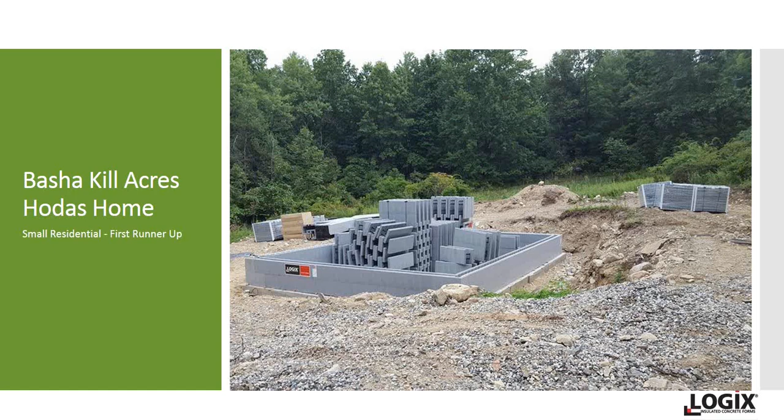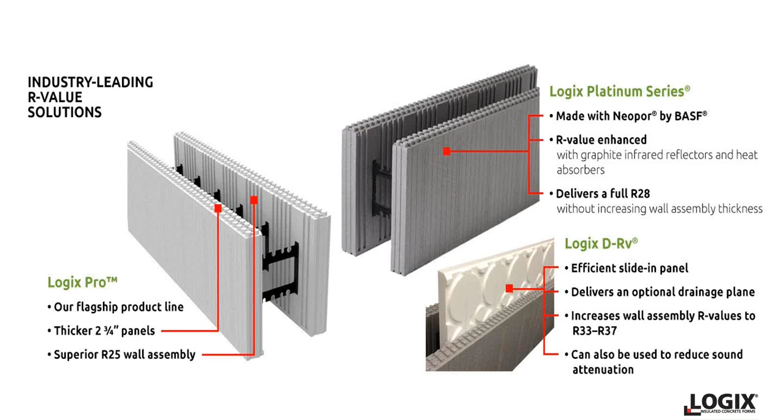This home is constructed with Logix Platinum Series forms with Logix D-Rv panels for an R36 R value. You can see in the bottom top right, Logix Platinum is made with an enhanced EPS, actually graphite polystyrene, which provides an R28 wall assembly R value, as opposed to the regular Logix Pro which provides an R25 R value. Troy also inserted the Logix D-Rv panels, which provide a supplemental R8, giving the wall system an R36, which is fantastic thermal performance.

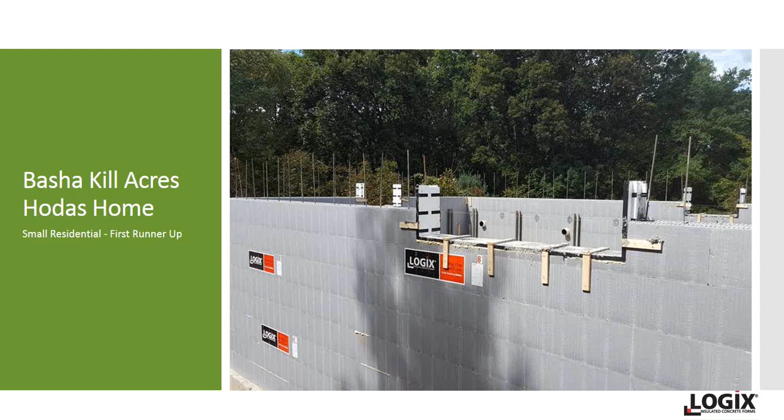Here we also see the house in progress, and you can see Mr. Hodas making use of the Logix Pro Buck for the window openings, once again to enhance the thermal performance of the building and eliminate thermal breaks at the window and door openings.

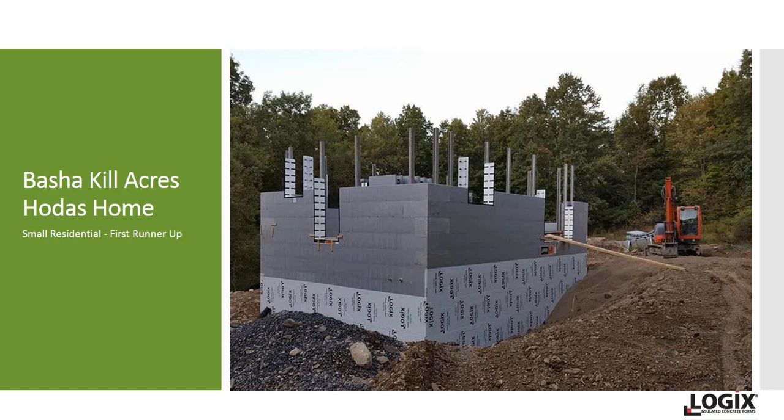You can see here the home taking shape. This was a self-built home; Troy and his friends built this home largely themselves. They had some classic things happen—midway through the build, a baby kid was on the way, which was fantastic but certainly provided a little distraction and excitement to the building process. But they persevered and moved along.

You can see that this home features a very simple rectangular design so as to reduce the heating and cooling loads and heat loss. The floor systems span wall to wall, allowing for an open concept design. The roof features a raised heel truss.

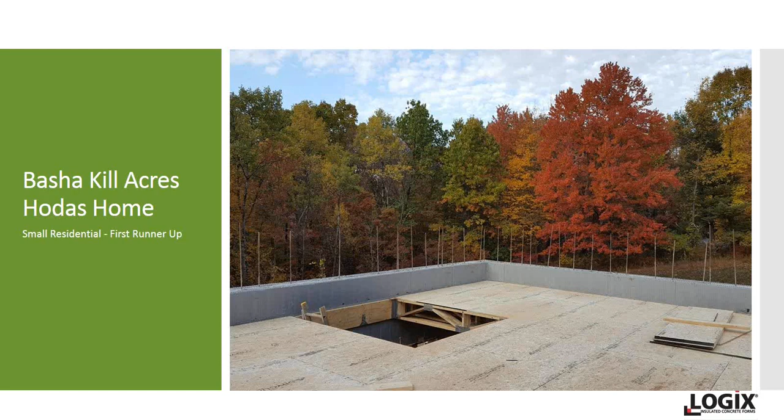You've got R20 under slab, R70 in the roof, and triple pane windows. So this is just an extremely thermally efficient building envelope.

Here's another picture of the project, and of course the setting is just beautiful. This home has a HERS rating of 30 without solar, which means it's 70% more energy efficient than your code-built home. So it's absolutely fantastic.

And it's a HERS rating of 3, which puts it in the top 3% of energy efficiency homes with solar. And there you can see the solar that this home has got, the PV panels. They'll eventually tie in solar thermal water heat that'll tie into the radiant floor heating, and that'll happen.

This home is in the country, in New York. This winter, an interesting story Troy sent over on a very cold day in February, it was 28 degrees Fahrenheit. The power went out, and not for the first time this year. Troy actually noticed that the temperature inside the home was 69.8 degrees.

5 hours later, when the power resumed, the home was still at 69.4 degrees. So it hardly moved, really showing the thermal performance and the thermal mass properties of the ICF walls. This home was constructed for roughly a very reasonable $126 per square foot.

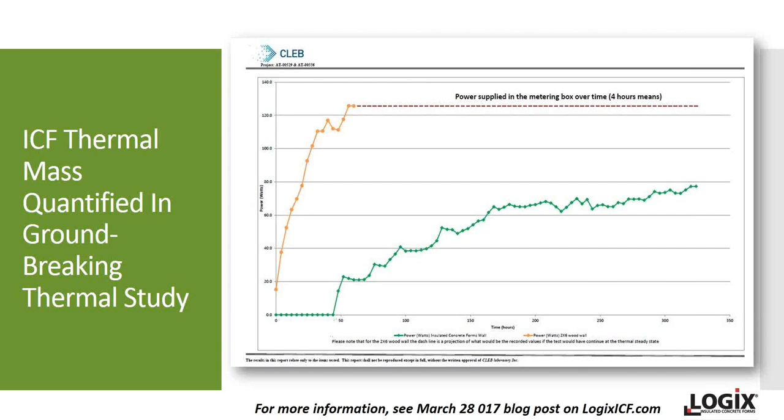So there were a lot of other really interesting things about this study, but if you want to learn more you can see that. Anyways, we want to congratulate Troy Hodas for being first runner-up, small residential.

Next category, or next project, our small residential outright winner. And the winner is Su Verde, the proud green home of Kentucky. This was built by Uber Green Spaces and Homes, and overseen by Travis Kittrell, Logix Territory Manager.

This home is located in Louisville, Kentucky. It's actually located in Norton Commons, which is a new urbanism community known to be very socially restorative, promoting health, wellness, and healthy spaces. In fact, this community has its own geothermal system that all the homes participate in.

This lot was picked specifically for the long side of the home to be facing south for proper heat loss and gain. And the developer, Sai Safi, who owns Uber Green Spaces, exquisitely detailed this home, not only in the finishes that you can see, but also in other aspects of it as well.

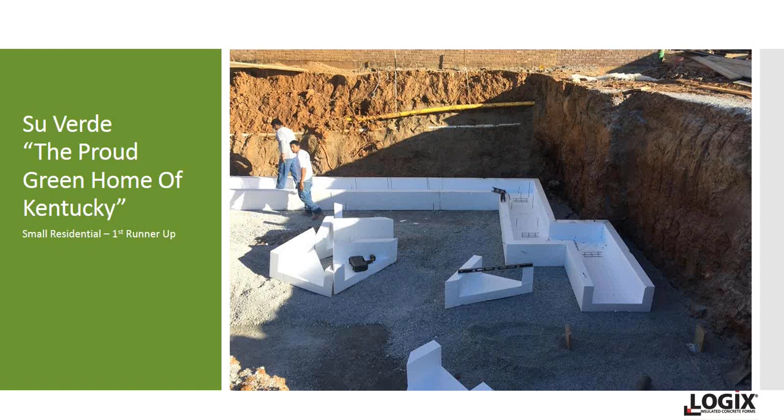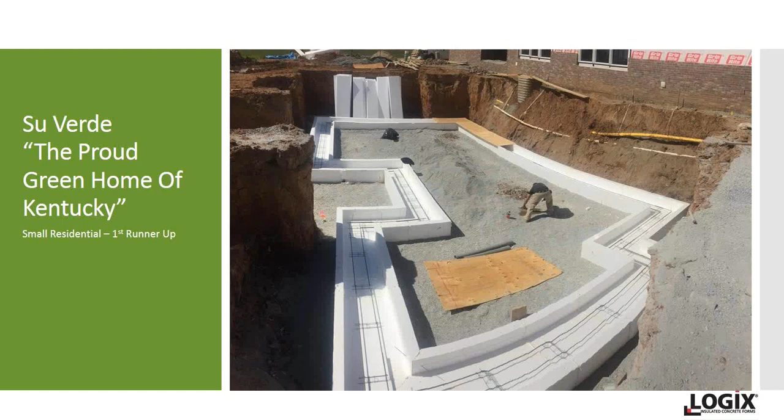Here's the project just starting, and the first thing that's unusual is that Sai actually had his footings fully insulated with these custom foam molds, and this is really rare, you don't see this too often. Sai went to the point of insulating his footings, and you can see a complete picture of that. Then they poured concrete in there, showing the insulated footings.

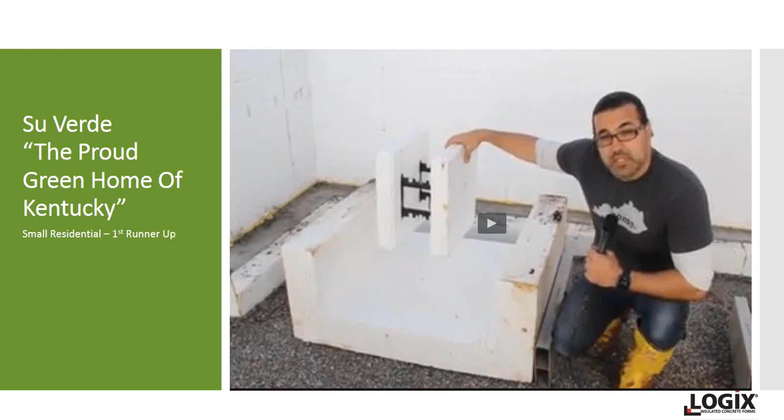There's Sai explaining how this worked on TV. This home got a lot of promotion online and in print exposure.

Sai is showing how the insulated footings integrated with the insulated Logix wall so as to be a complete thermal break. Sai approached this home wanting all sides of the home to be significant and efficient thermal breaks.

He insulated the footers and under slab with 6 inches of foam. The flat roof is insulated with 6 inches of foam, and areas that weren't flat were insulated with 22 inches of open cell foam, so the roof is actually R85.

The exterior walls, which you're starting to see here, were furred out to be beyond the typical Logix R25. They were furred out to hit R40.

Sai also used, as did Troy in the previous project, the Logix Pro Buck to eliminate thermal breaks through the wall at the openings. Here you can see the house taking shape.

Sai also specified triple pane windows, European triple pane windows for this home. This home tested at a sparkling 0.6 air changes per hour.

This home was a demonstration house in the local Homerama. It's LEED Platinum certified, NAHB certified, Emerald certified, DOE Net Zero, Passive House certified, and met the Living Building Challenge.

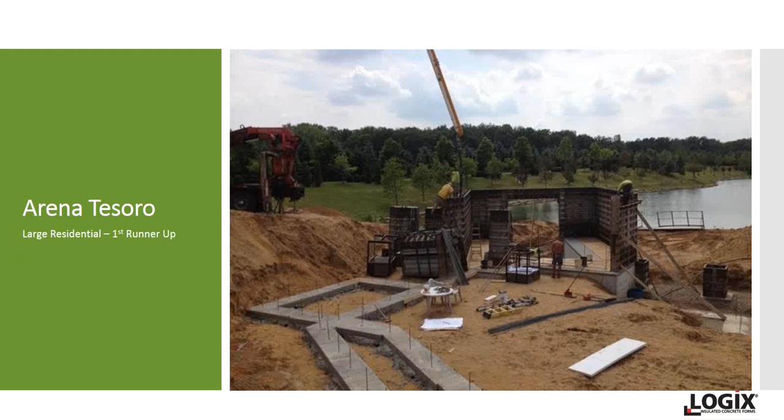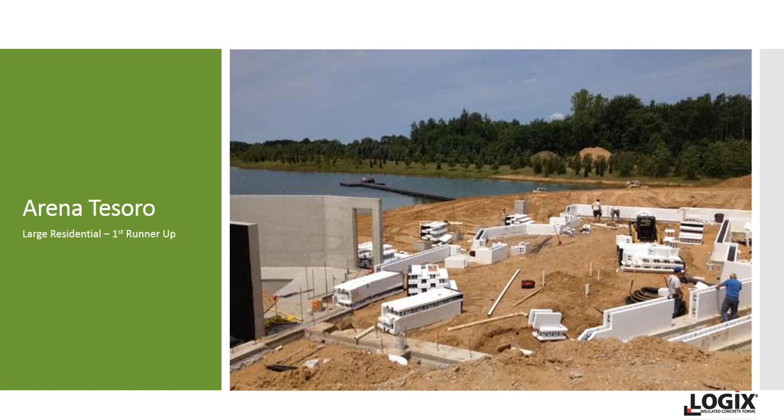They used—and there you can see the footings for the actual boathouse, just starting in on the footings there. Another shot: they used 10-inch Logix Pro forms for the basement walls and 6-inch Logix forms for above grade. That 4-inch differential created a ledge for the main floor system that they hung bar joists on.

This home features 12-foot high main floor walls, including a flying gable. You can see the brick ledge being used on the outside there to support a lot of the stone finishes that are going to eventually be on the home.

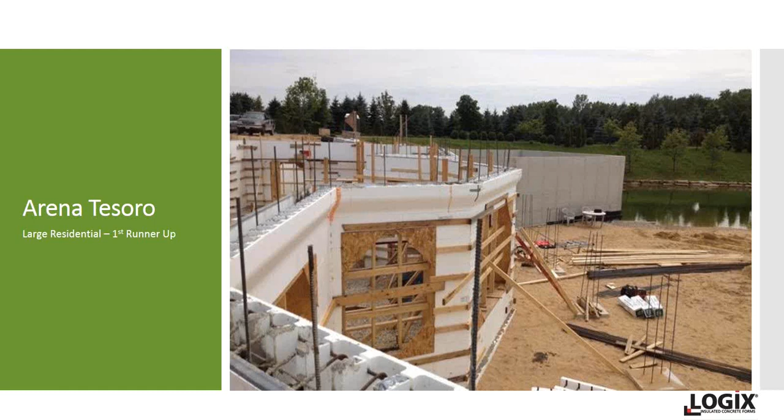You can see them proceeding here, and they're on the boathouse, laying the precast floor system bearing on the Logix walls for the boathouse. And of course, that lake, that's their own lake that they have, which is fantastic.

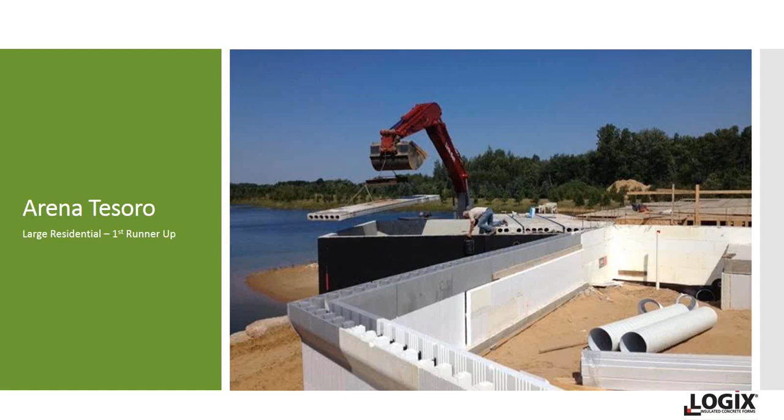There are many unusual angles to this home. They have an indoor pool—you can build your indoor pool with Logix and your pools with ICF, but they did not. They chose to just form it regularly.

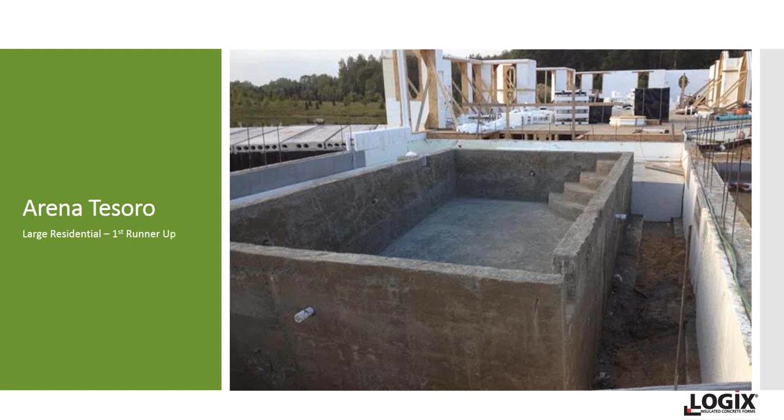Probably the most difficult aspect of this home was the boathouse, which juts 45 degrees out from the home. The footings to the boathouse were 7 feet below water level, while the main house footings are 2 feet below water level—a 5-foot differential, very challenging to connect all of that up.

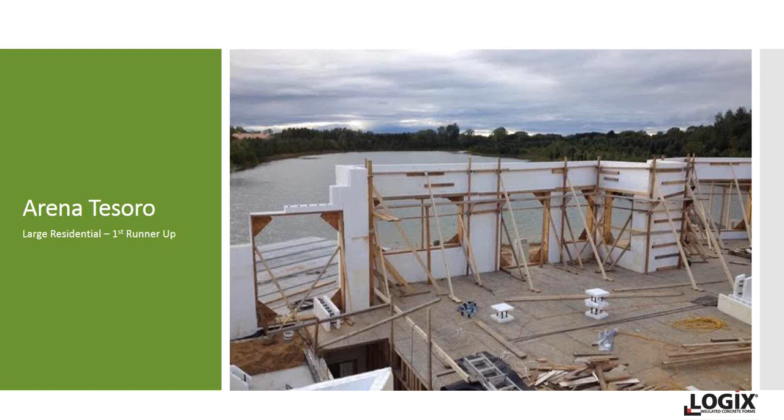And there you can see everyone moving the process over the flying gable and over the arched windows. This home was actually built by the homeowner, who took a Logix training course.

Lots of homes can be built by Logix. Most are built by professional builders, some are built by homeowners, but very few of this size and scope are undertaken by a homeowner for their first home. So it's an incredible achievement.

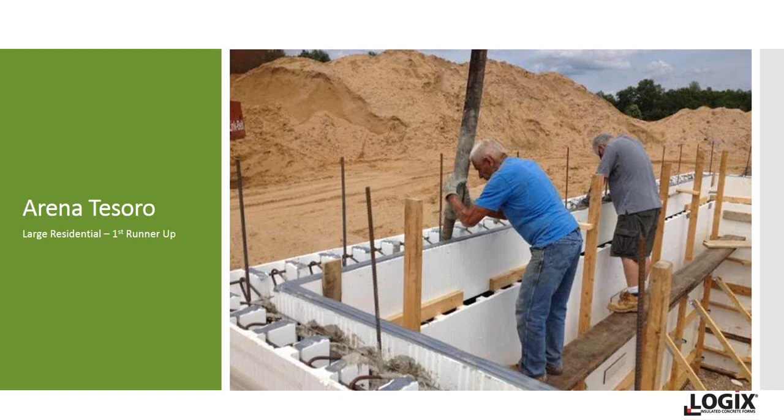This home is heated with 4 ground source heat pumps. The monthly heating budget is estimated to be $300 a month, including heating the water of the indoor pool.

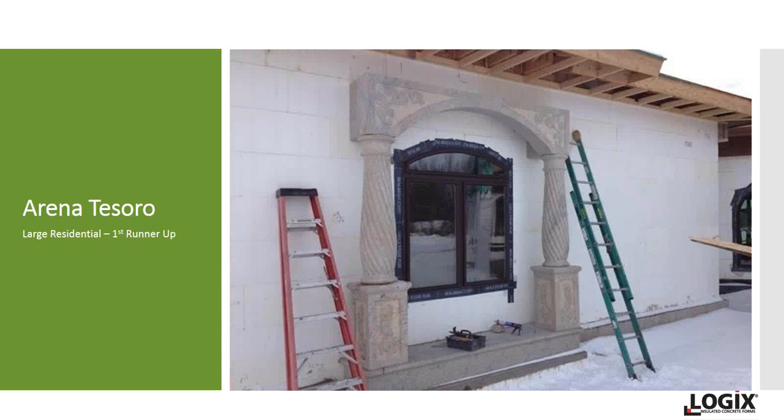And of course, it's all about the detailing here. The owner owns Carved Stone Creations, and now you're going to see the carved stone—all of this incredible detailing. There are oval windows, arched windows, and so many stone accents throughout.

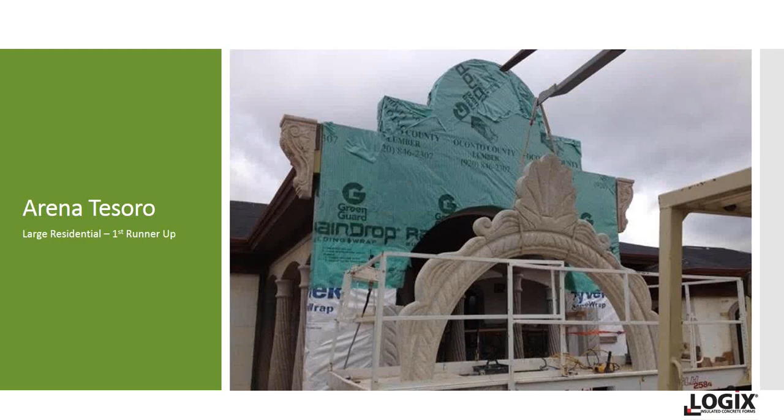This is just an exquisitely detailed home. This is some of the work outside, and there's inside some of the beautiful finishing that you just see so rarely. Oh, look at that.

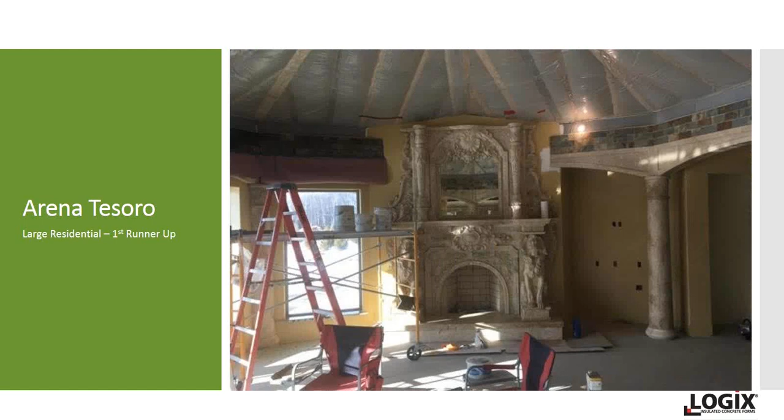Okay, on to the winner. The large residential winner, and you say, how do you top a home like that? The winner in the large residential category is the Shelving Rock Home. The Shelving Rock Home is constructed by Half Moon Construction. The Logix distributor is Curtis Lumber, and the Logix territory manager is Win Peck. This home is located in upstate New York.

We actually have the builder of the home with us. Andy, are you with us? Yes, I am. Okay, I'd like to introduce everyone to Andy Ellis, and Andy is going to take us through some of the elements of this home from his perspective. I will say first off that not only has Shelving Rock won Best Large Residential Home for Logix in the Logix Awards back in January in Las Vegas, this home was also recognized as the large residential winner for the ICF Builder Awards, which are industry-wide awards. So a fantastic honor. So Andy, take us through.

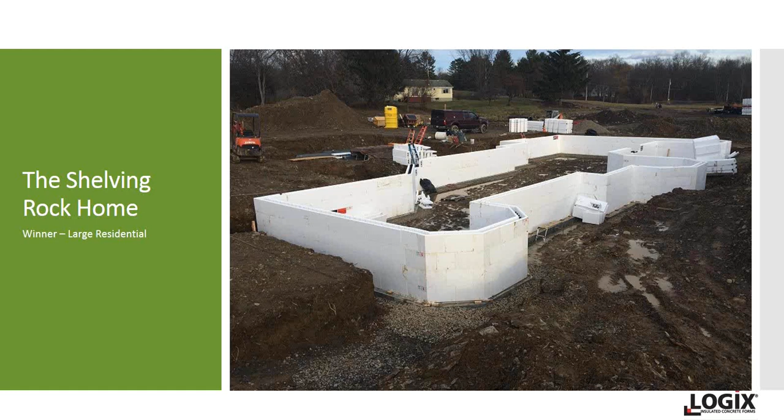You can see here in this picture, there's nothing rectangular about this house at all. We had 30 corners total, 16 of them were 45-degree angles. Here you can see we had continuous Logix ICF to the roof line, and we spanned our floor joists, hung them on the inside.

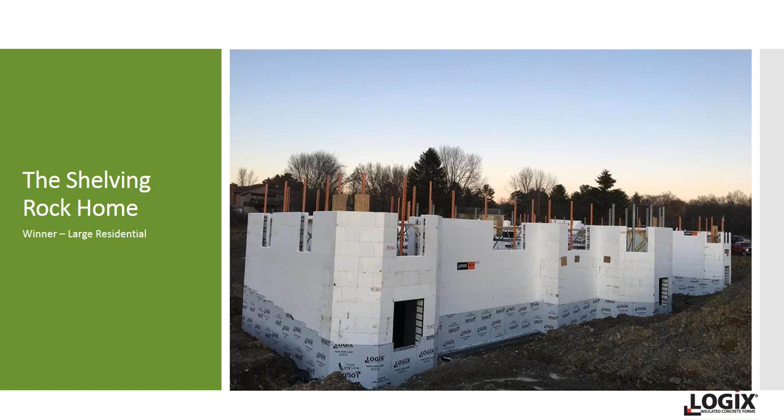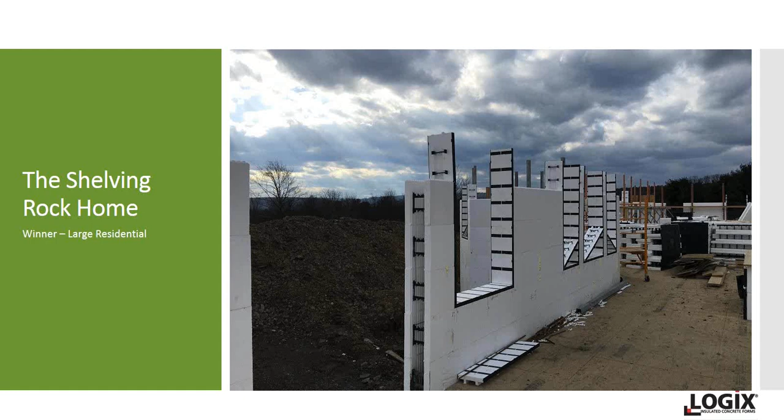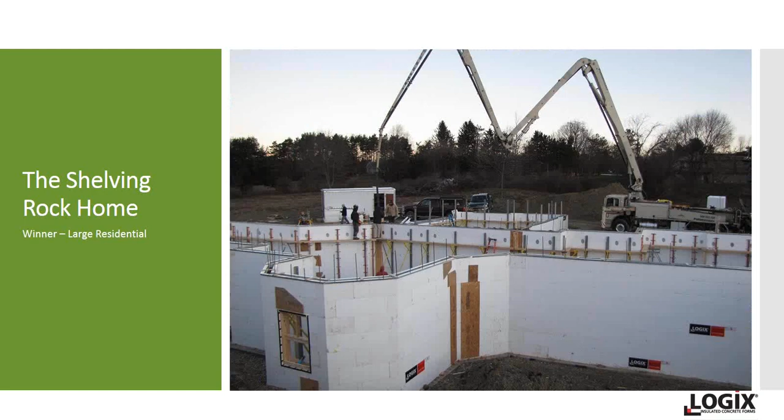This was a winter build. We started on December 4th with our excavation, and every one of our ICF pours was in the middle of the winter. One of our pours was about 15 degrees, and the next day, the concrete, we did a thermal imaging test, and it was still 72 degrees. So it was great.

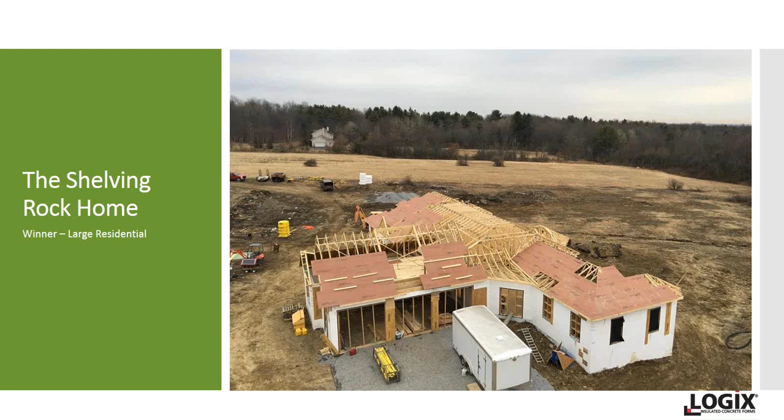That blocked the insulation value. You can see that's our main floor. It was a ranch. We had 178 trusses on this house, a very complicated roof line. And to the right of that picture was an in-law suite. So we had three generations living in this house, and a lot of custom design.

We had a big span across the back deck there on the right-hand side, about 30 foot wide roof line, with a clear view of their backyard. You can see the three little green pods in the back. That was a really cool septic system we put in.

It was a Norweco clean discharge system. It reduced about 30% to our leach field.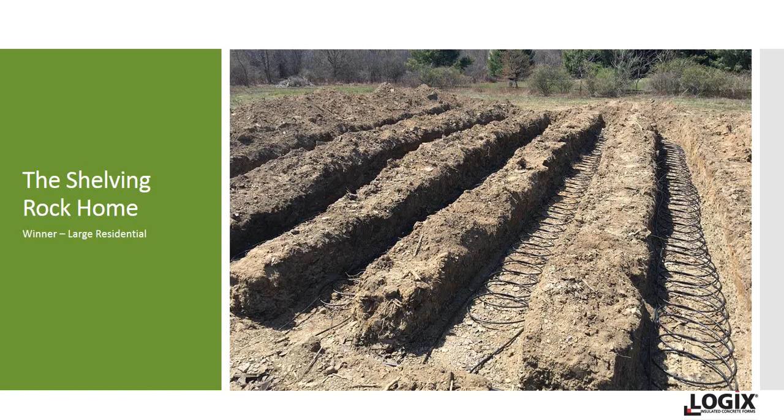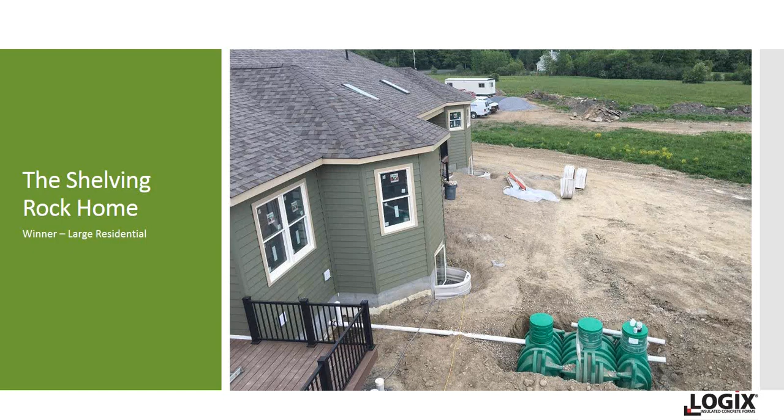And we did a geothermal ground source, horizontal. There were 5 loops, a 2-ton system, with 75-foot loops, and we estimated about $559 a year for the cooling, and about $139 a year for the heating. About a savings of $4,300 over propane.

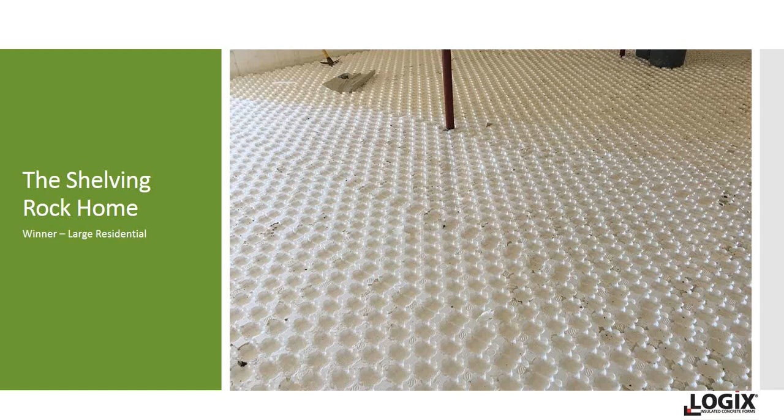In the basement here, you can see we did the heat sheet, the R10 heat sheet with radiant tubing in it, and we also did that in the garage.

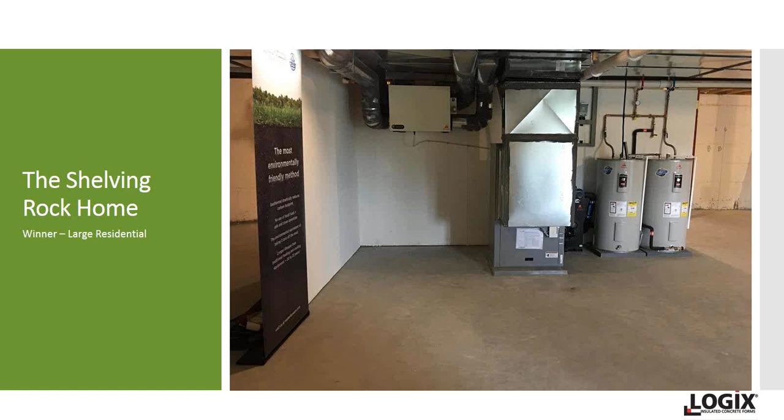There's our geothermal system. One of the benefits of having Aztec Geothermal do this for us, we had a 2-tank de-superheater hot water system. So basically, the ground source geo provides the domestic hot water system for free.

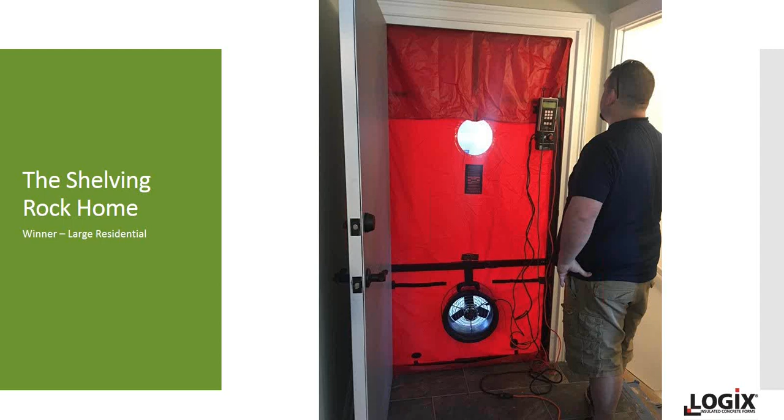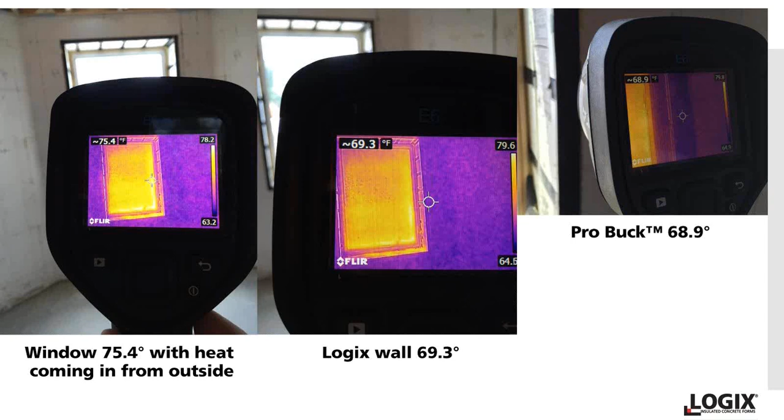We got a 0.3 air exchanges an hour with our blower door test. We had a HERS rating of 33 without any PV on the house. We used ProBuck on the entire house, all the doors and windows had ProBuck, and you can see there's our thermal imaging, and there was no air leakage around the windows, no energy loss.

Our kitchen had part of the universal design; we had a sliding drawer microwave. Everything in the house was designed to be aging in place. The doors were 36 inches wide, many of them were pocket doors. We had 4-foot wide hallways, door handles instead of door knobs, and no steps in our showers.

The house was also in our Capital Region Builders and Remodelers Association Parade of Homes, and we won several awards for that, for energy efficiency and product innovation use. Well, thank you very much.

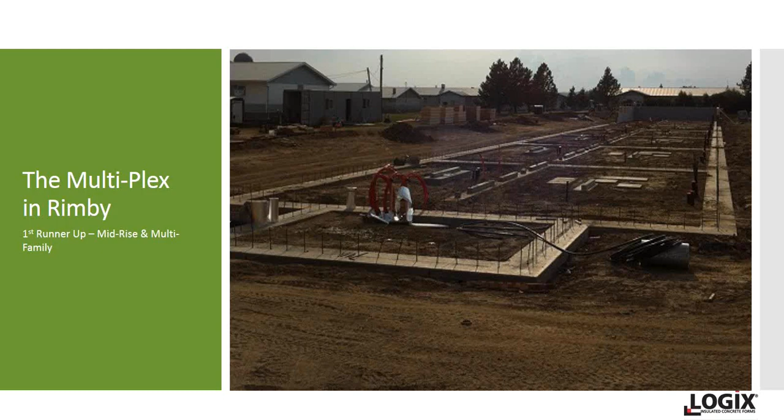They were splitting into creating a daughter colony, so they bought new land and needed new facilities. This will be the centerpiece of the living accommodations.

We have here 7 units. Each unit is large, 52 feet by 52 feet and 2 floors. So each unit really is about 5,400 square feet of living space.

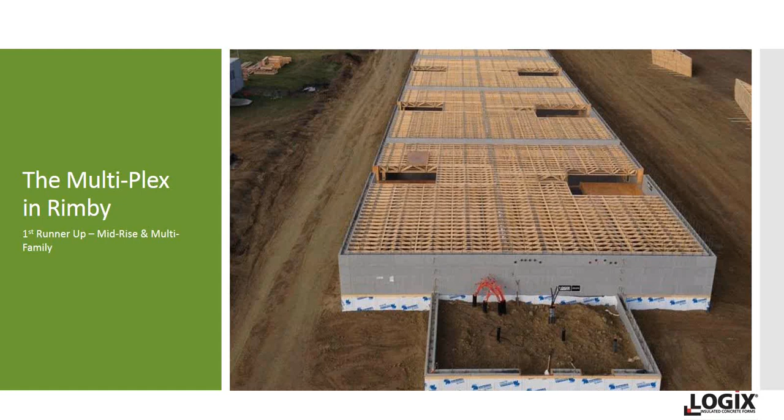Each unit will have about 5 to 6 bedrooms. There's no kitchen in the units, as all the dining is done in common areas on the colony.

There you can see the floor system being set in. It was really rather perhaps even over-designed in the rebar—a significant rebar cage pattern that the builders had to deal with.

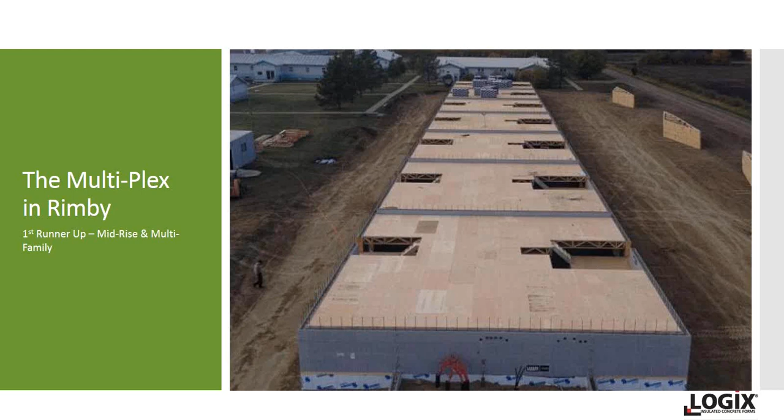15M, or number 5 bar, on a 16-inch by 16-inch pattern, which is heavy for a 6-inch core concrete wall. There was also radiant floor in the slab.

You can see the floor joist of the main floor here. This is the Logix Platinum series; you can see the gray foam was selected for that, with the superior R28 value.

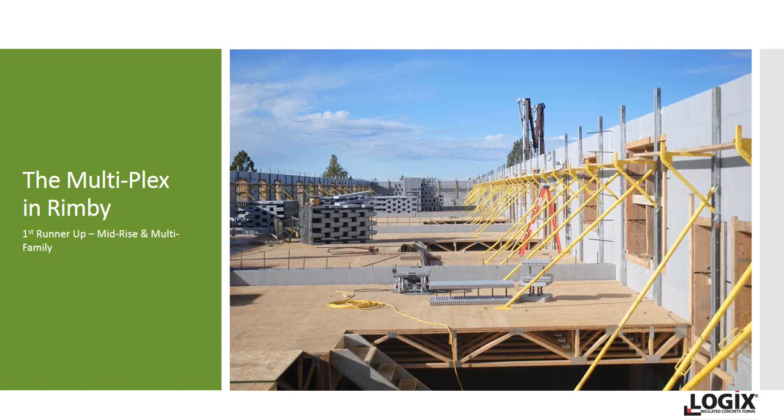Hutterites build their homes with a very long-term perspective. They have a view of 100 to 200 years, and that's how they designed and built this home.

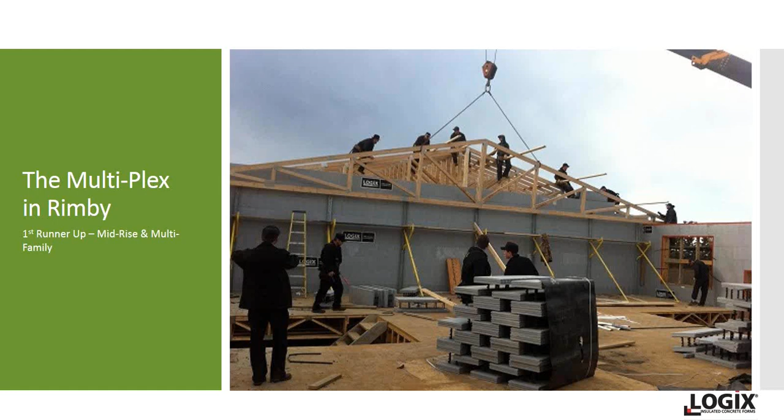They're putting the roof system on, largely self-built by the colony, with a lot of help from our Logix people—a Logix dealer in the area.

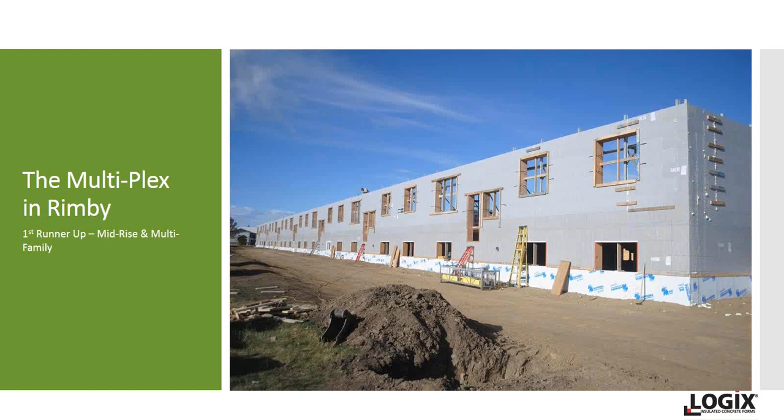There's the concrete pour. Some other shots—we're very much hoping that this project will position Logix for future Hutterite business in Alberta, which is substantial.

There are many such colonies in the province of Alberta, and there's a gorgeous shot of this project. So once again, congratulations to Solid ICF and Matt Cravera for the multiplex at Rimby.

On to the winner for mid-rise multifamily. The winner is Oxbow at Tuxedo Point, built by HP Builders and overseen by Logix Territory Manager Conrad Hopner.

This project is located in Winnipeg, Manitoba, and is actually part of an ICF mid-rise phenomenon. This is one city in Canada, a medium-sized city in the province of Manitoba.

These have been built with ICF in the greater city, and this is now starting to spread across Canada and through much of the United States. ICF is just a wonderful way to build mid-rise buildings, and it's becoming more and more popular all the time.

Today we have with us Harv Schellenberg of HP Builders. Harv, are you there? Hi, Andy. Yes, I'm here. Harv, take us through this project.

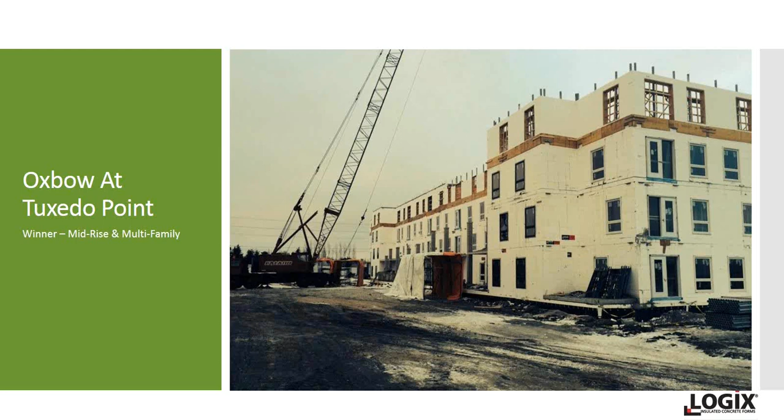In this project, CMU was used for the load-bearing demising walls and corridor walls, with ICF on the exterior. The parkade floor is a poured slab, and the above-grade floors were precast.

Each floor area was completed in about a 4-week cycle, alternating sides. So we would start on one side with our forms, and once we completed that half of the building...

...the hollow core floor was flown on, while the other side was completed with ICF and CMU. And so we...

Once you get a little taller on the building, it gets a little tougher to go down to the lunch trailer. This also was a winter build, so it's a little cold in Winnipeg, and the boys built a temporary ICF shack—that's what you see flying through the air there.

They actually had a microwave in there, a little electric heater, and a coffee maker, as well as benches and shelves for taking their breaks.

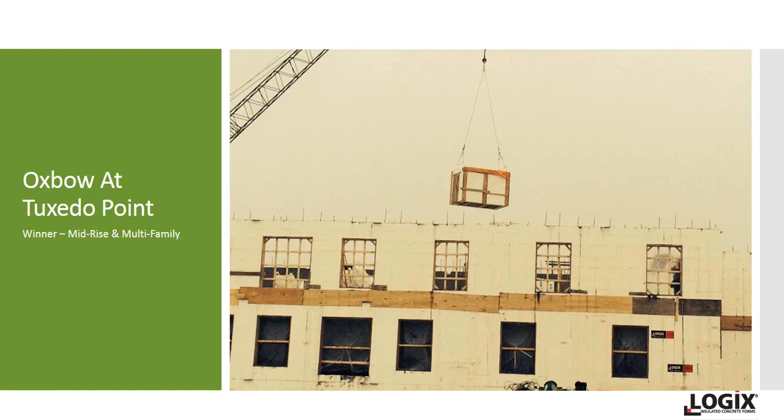Some of the things we wanted to highlight on this project was the ICF versus CMU. On any floor, the CMU is installed by a 10-man crew, and since we did most of the build in winter, the CMU needed to be hoarded, structured in, and heated, whereas with an 8-man crew, no hoarding was necessary.

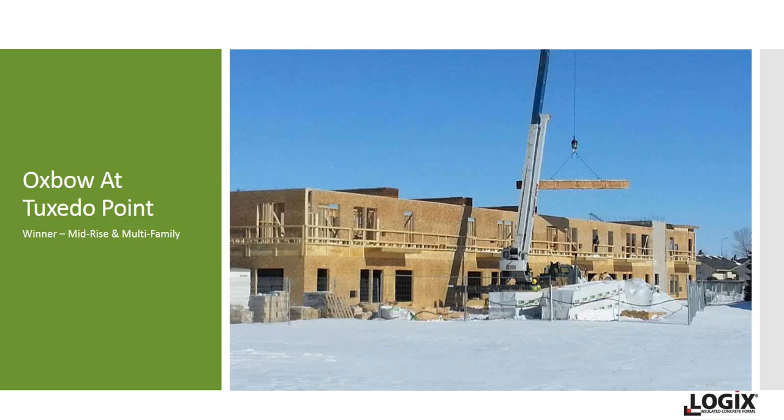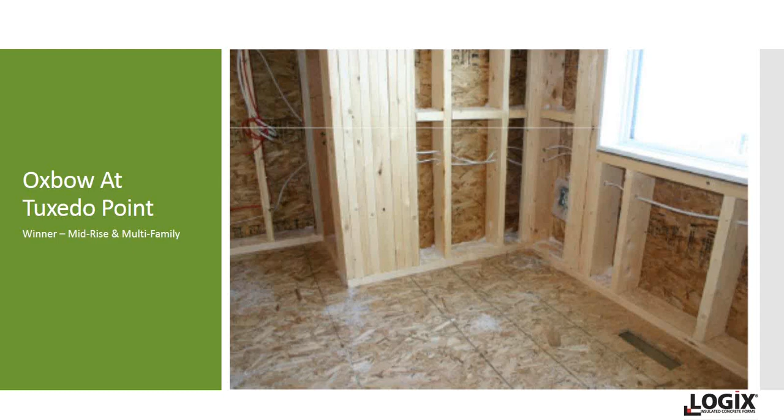We also do wood framing, and on this project we actually did a project right beside it. We had a crew of 14 to 20 men on a wood frame building right beside a 5-story ICF building where we had 8 guys, and the progression of schedule was fairly similar. So we had a lot more man hours in our wood structure than in our ICF. There's a lot more structural members required in wood, and the more wood you put in, the less insulation space is available, so you can see how that might be a little less energy efficient.

Well, thank you very much, Harv. Yeah, I want to say congratulations for the Oxbow at Tuxedo Point. This is our winner, mid-rise and multifamily.

Harv was also on one of our development tests of a new product, our Logix XP1. It's a one-sided system, brand new. Harv, you were on site helping us test this out, so could you take us through your quick thoughts on what you think of this and where it can apply?

Over the past number of years, developers have been asking if an ICF can have one side that strips off for locations such as parkades, elevator shafts, and stairways. Logix came up with the XP1 to address this. It's a one-sided styrofoam form with a conventional form on the other side, great for areas where the finish needs only be concrete face.

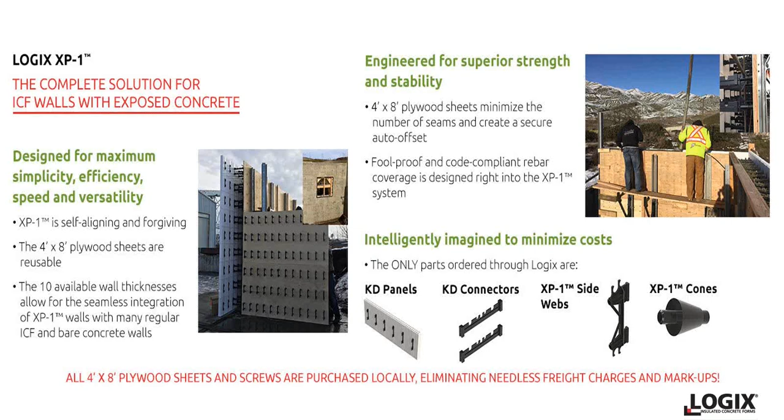I was involved in the testing of this, and the test wall we did was actually 12 feet tall by 14 and 3/4 inches thick. I was a little nervous, but it held up superbly, and I'm really excited about getting to use it. We already have a number of different projects where developers, designers, and owners are excited about putting it to use. So excited about this new product.

Thank you very much, Harvey.

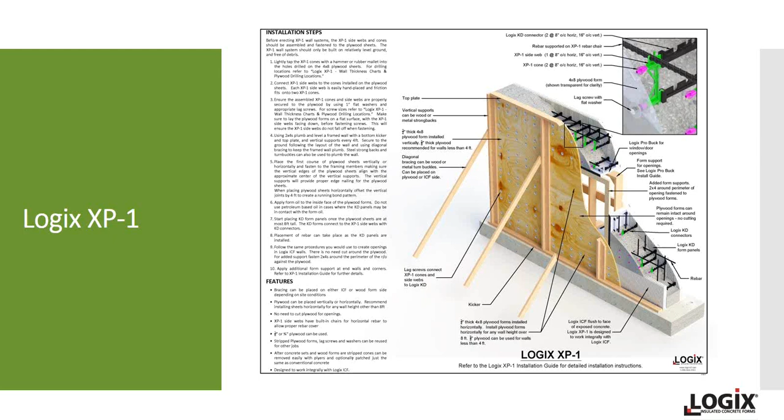Proceeding back to the awards, the most outstanding commercial project, always a very interesting category. We're recognizing 2 projects today, our first runner-up and our winner. Our first runner-up is Cabela's North Edmonton, once again constructed by HP Builders featuring Harv Schellenberg, supported this time by Beaver Plastics Limited, the Logix manufacturer located in Edmonton. This is one of 5 Cabela's built with insulated concrete forms in Canada, 4 of those done by Logix, so there's a very interesting story to tell here.

And Harv, are you still with us? I am. Can you take us through this project? This is the third Cabela's that we did, and this one was 26,500 square feet of retail facility.

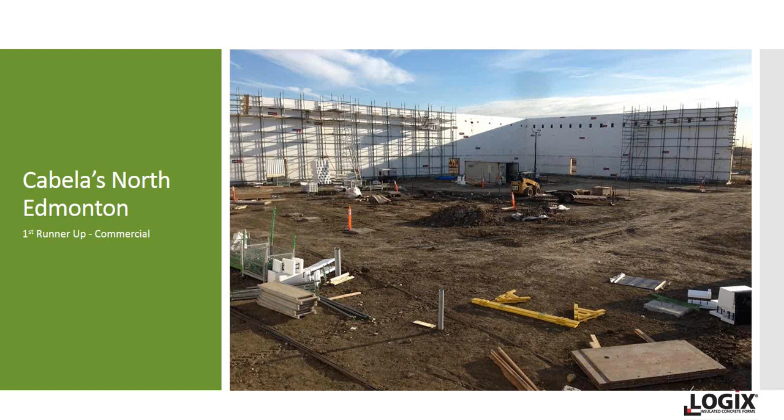The installation took 7 weeks from September to November, which brought us into some winter conditions there as well. There's not a lot to say about this project because it went so well.

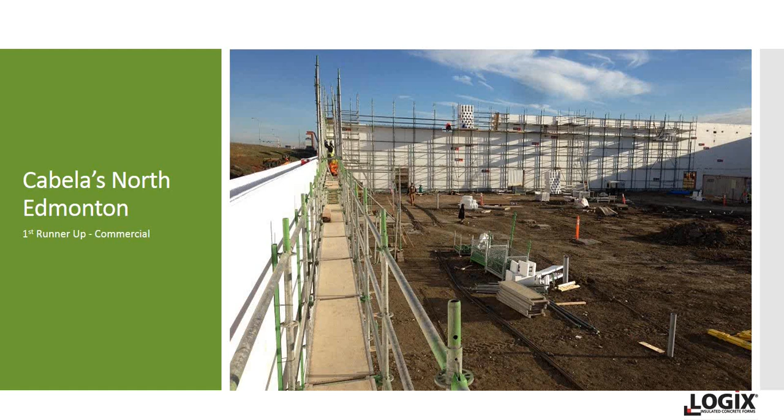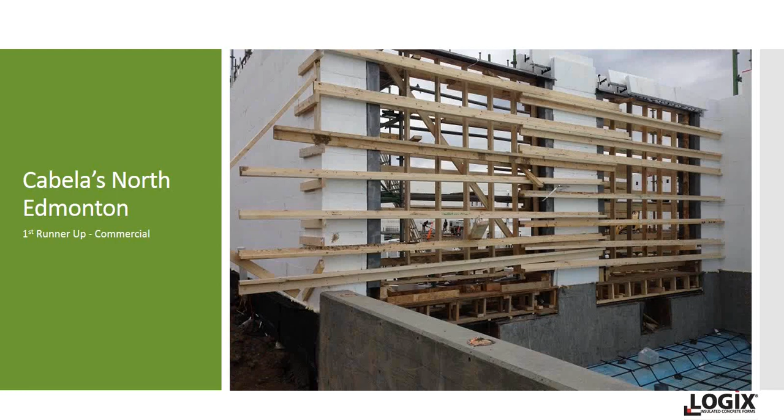We used the Uniscap alignment system, and it's really a great system with its staging bays, allowing us to just add on as we move up. We poured in 3 different stages, at the 10-foot, the 20-foot, and the 30-foot.

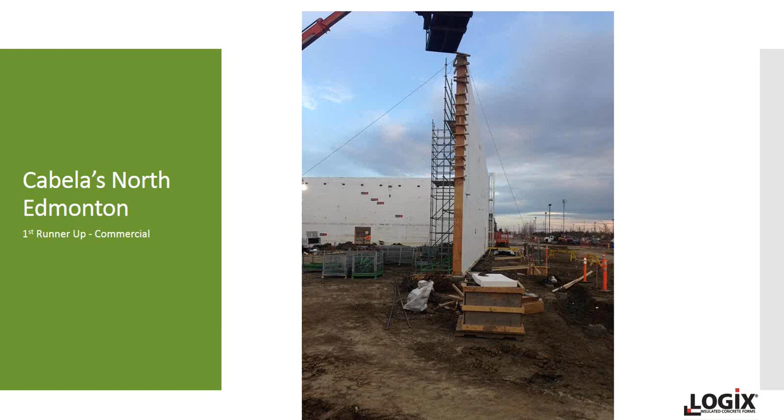PCL was the general contractor, and they had never used ICF before, so they were very impressed with the product and the speed at which we were able to put up the exterior shell.

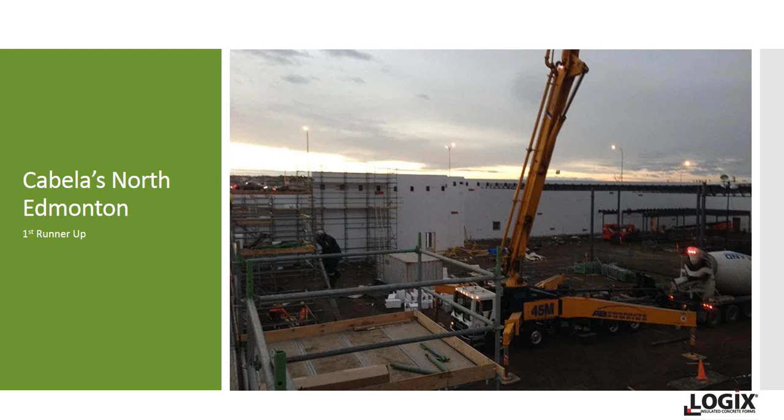As you can see, there are a number of large embeds in there, where the open steel roof trusses were welded to, and so we had to install those, which was pretty cool.

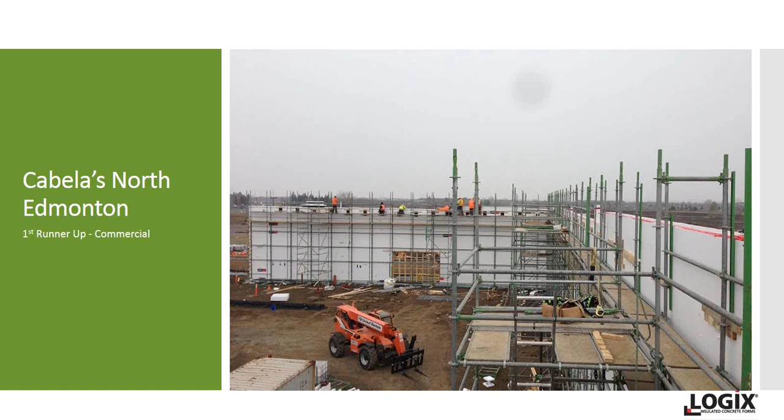Also, we used the knockdown system, the Logix knockdown block, when we came into the integral rebar columns required underneath the main trusses, or girders, of the steel roof system. The knockdown was really good for us—it allowed us to tie the horizontal cage in pretty tight.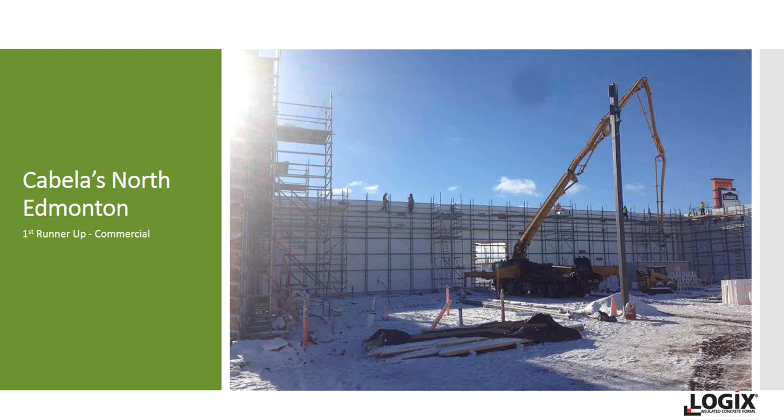The rebar was pretty tight together at that point. We also used a form lock in a vertical application where they had a control joint every 40 feet vertically in the wall. We used half-inch styrofoam and form lock: the web as one side, flipped the half-inch styrofoam, and then used the form lock on the other side, allowing for great support to the wall there.

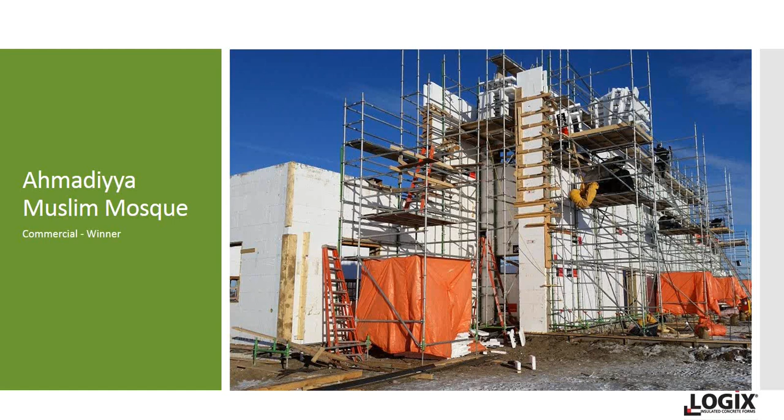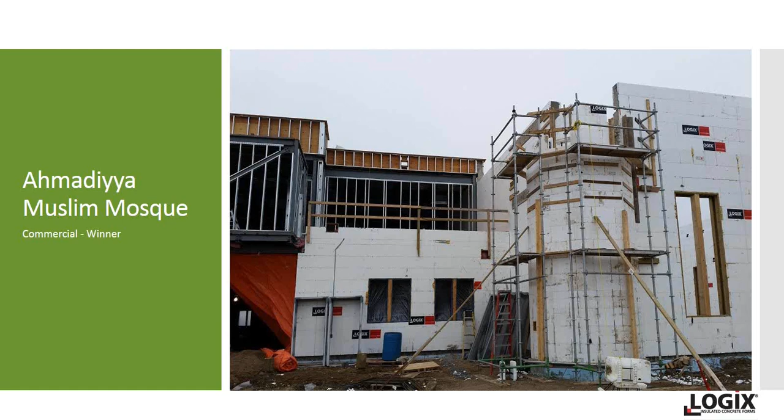So that's a lot of complexity in a build that they overcame and did a fantastic job with. This project was originally specified with another ICF. A contractor bid the job with Logix and also incorporated the uniscaffold bracing that Harv had talked about in the previous project. That contractor did not win the bid, but the GC was so impressed with the bracing system combined with the Logix ICF system that they eventually elected to self-perform their first ICF installation, choosing the Logix and uniscaffold combination.

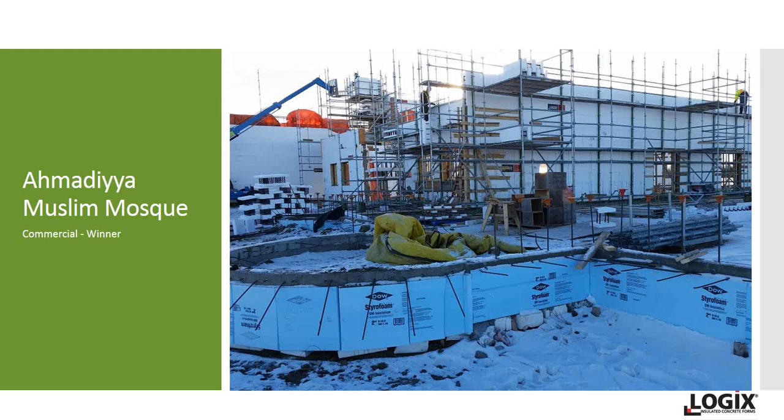There you can see them in winter, with the uniscaffold creating the tall walls. This job was originally specified for R40, but at the end of the day they felt they didn't need that much R value, so they reduced it to R33 using 10-inch Logix Pro and DRV inserts, which if you recall, Troy Hodas used in his small residential first runner-up. Troy used the Platinum and the DRV for an R36, and in this case they used Pro and DRV for an R33.

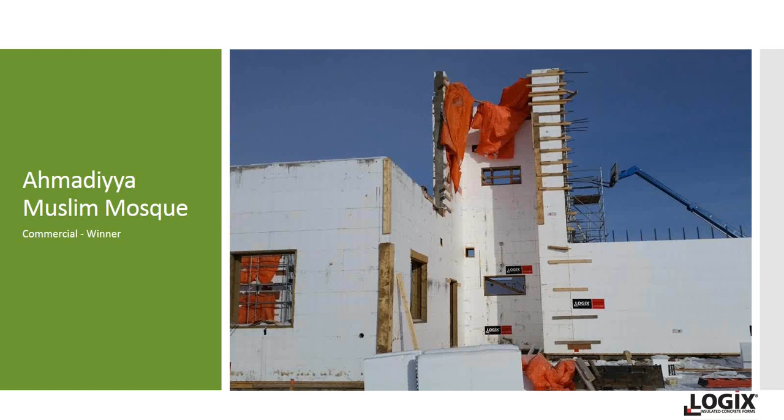It was a complicated job. It featured 30-foot, 28-foot, and 25-foot tall walls. It had a parapet made with Logix, a turret, and to top it off, a 12-foot feature minaret built with Logix. There were also many short corners, which present difficulty.

They had some integration of 10-inch block with 8-inch block. They had grade beams that were originally formed too narrowly, so that had to be accommodated. Plus it was so cold that, prior to the pour—usually ICF builds swimmingly through cold conditions—this got so cold that they actually had to heat the inside of the forms to warm up the rebar and get the frost off the rebar prior to the pour.

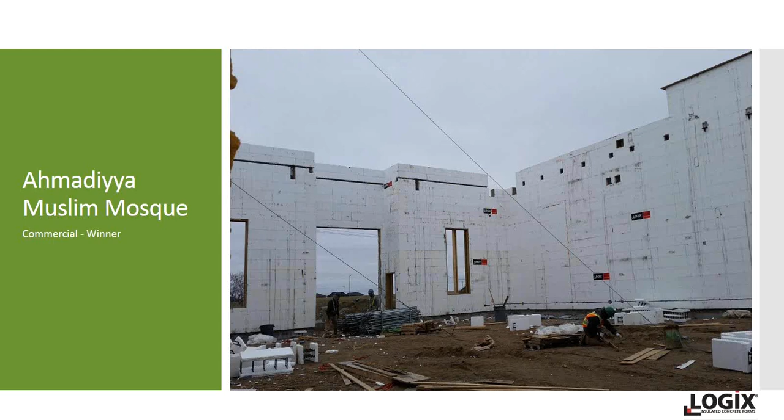So it had a lot going for it, going in—a lot to overcome—and it just went fantastic. It's built by a highway, so the sound attenuation, the quietness inside the building, is going to be key. The Logix was also used for the demising walls between the three primary functional areas of the mosque, so it was interior walls as well as exterior. A very high-profile job, a difficult job done by a first-time contractor in winter.

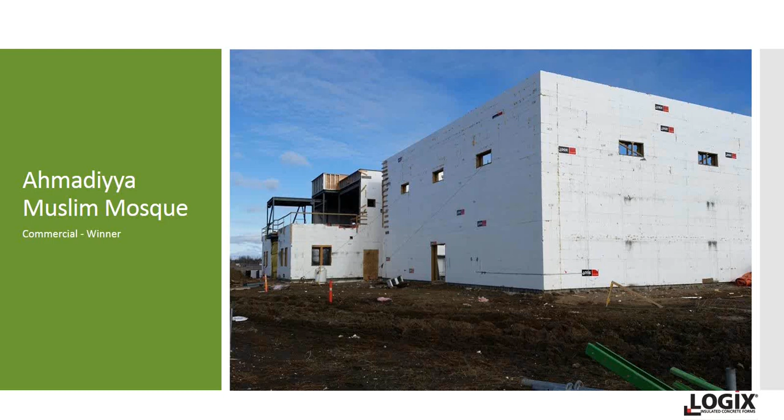So congratulations to everybody involved. For the Ahmadiyya Muslim Mosque, this is the winning commercial project in the 2017 Logix Awards.